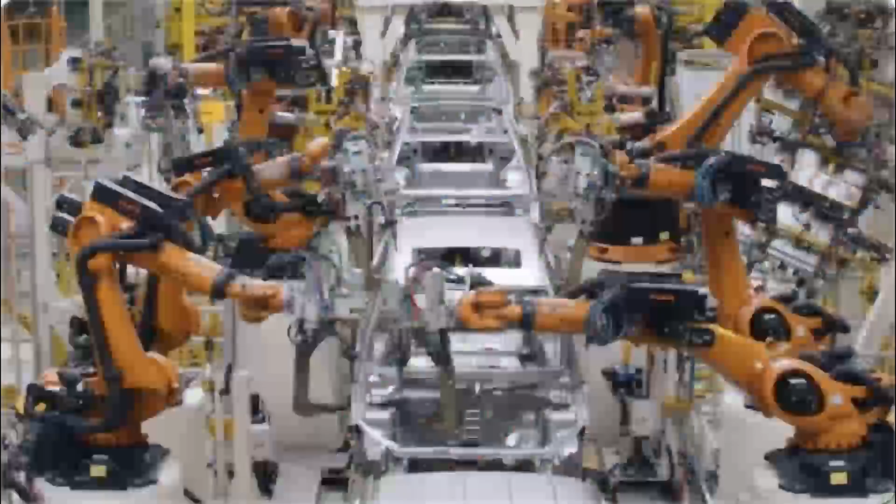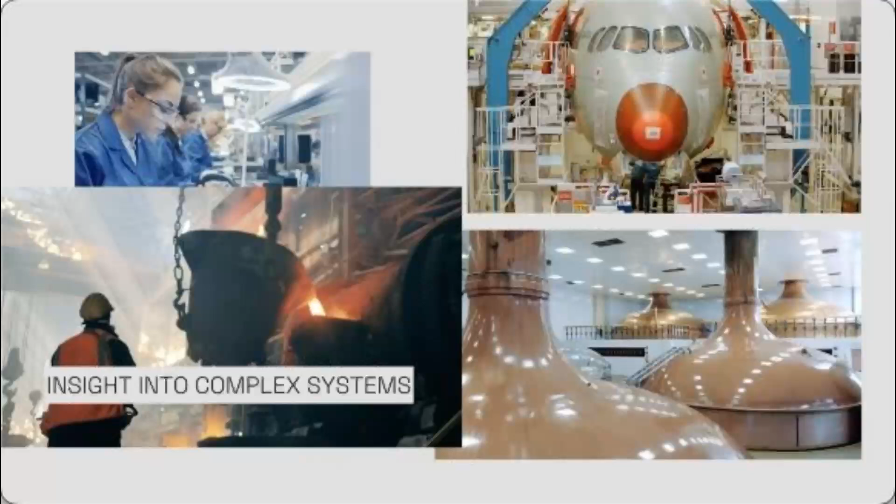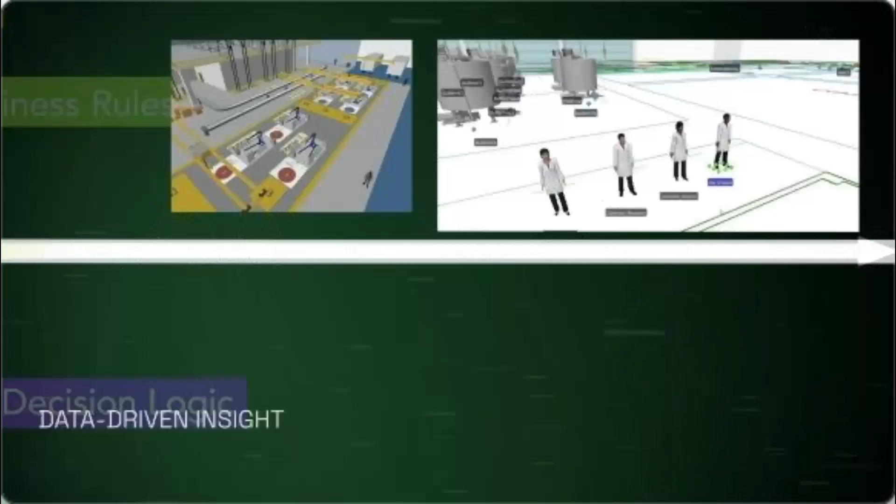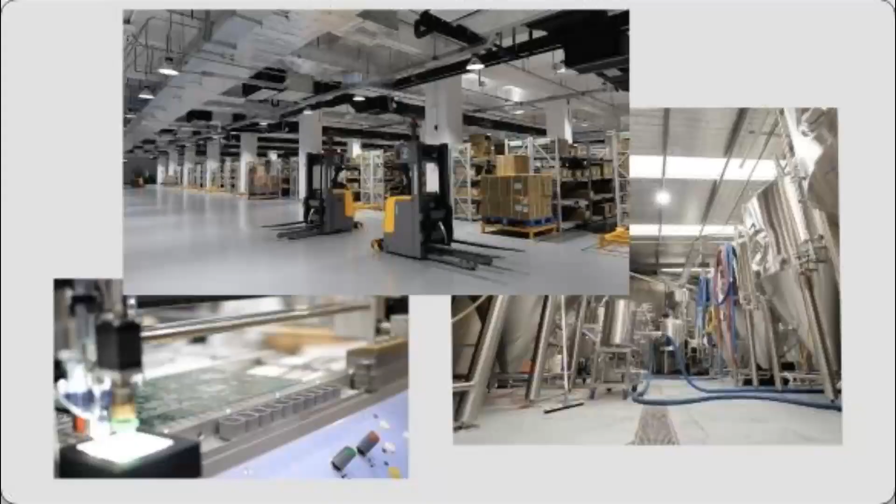At Simio, we're in the business of showing you the future. Our intelligent technology gives you unprecedented insight into complex systems to identify and solve today's inefficiencies and tomorrow's challenges. The Simio solution provides a low-risk opportunity to drive transformational change. Our true digital twin models capture all the constraints, business rules, and decision logic that define the operation of your system. When powered by your data, easily evaluate unlimited scenarios and deliver optimized solutions. No matter what industry you're in, eliminate your greatest operational process and scheduling challenges with a Simio digital twin. See your future success, Simio.

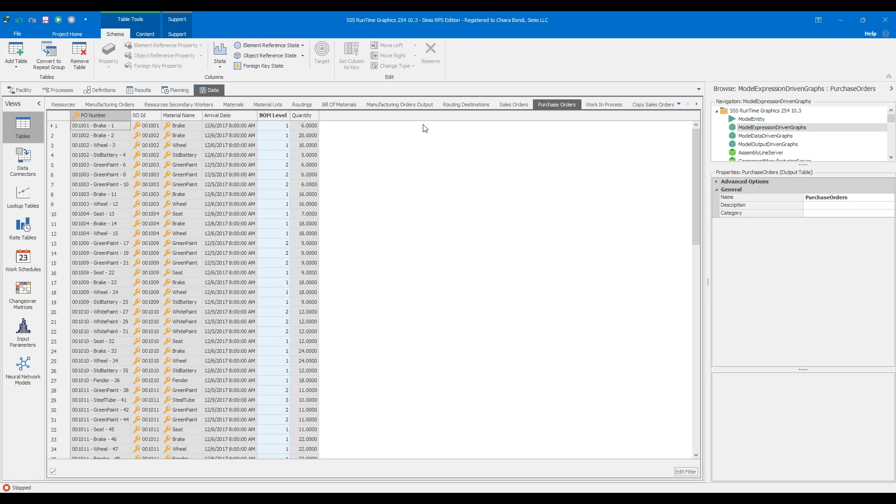So again, all of this is driven from data, which is stored right here in our data tab. All the different sales orders are stored here. And then depending on the materials required, we're actually producing different purchase orders for the raw material and then manufacturing orders for the different components that will be used in the actual sales orders.

Now, if we look back to the facility, we'll see a lot of visual components attached to it. Some of them have been explained in our previous Simio Sync Series by Adam on how to enhance the visual component of your models using different graphics and visuals. If you want to learn more about that, I highly suggest you go back and watch the recording of that session. I think that was very interesting.

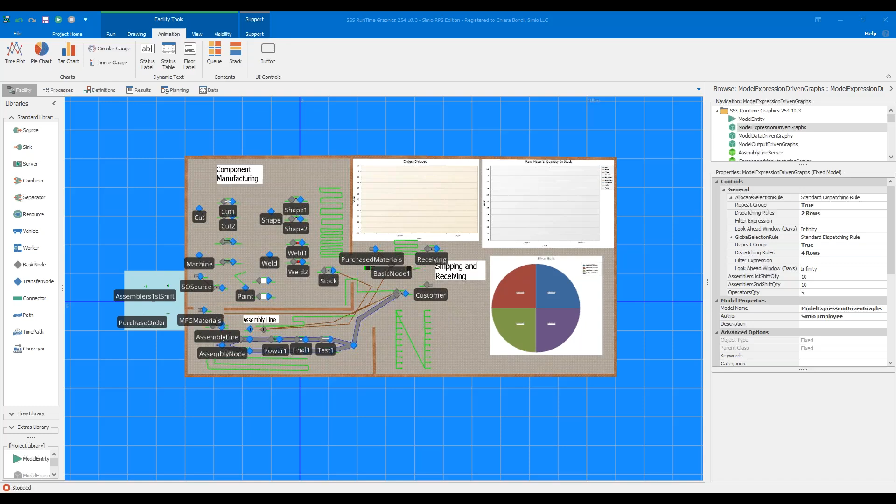But in this particular session, what we're focusing on is more on the right-hand side of the screen — specifically, the ability to add different charts to your model to visualize data in real time. Since the release of Simio 249, there have been a few updates on the different possibilities of what types of charts you can use. Right now I have, let me zoom in over here, 3 different charts, all sourcing data from specific expressions that I've inputted into the actual charts.

So here, for example, if I then expand onto here — confirming you can see my property editor? Yes, Chiara, all good. Okay, awesome, just making sure that we're sharing all the screens. So in these different charts, you can add or remove very specific expressions that you can type into, kind of like you would do any other expression or assignment in process logic.

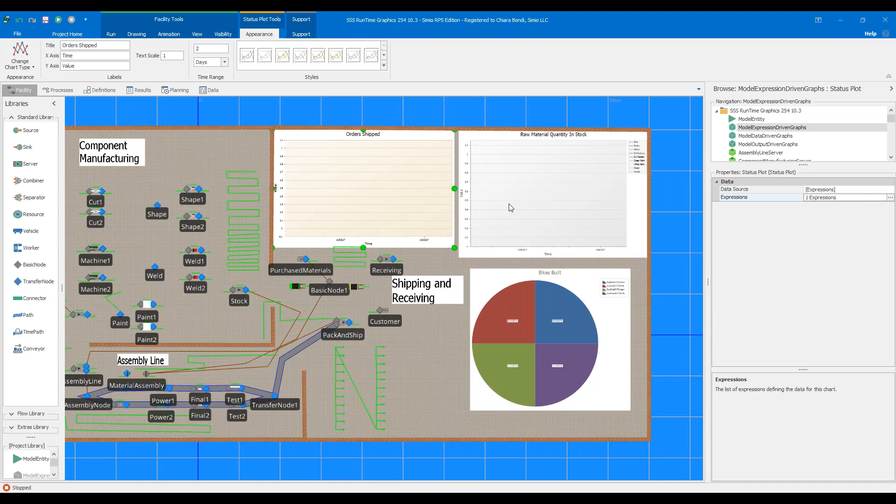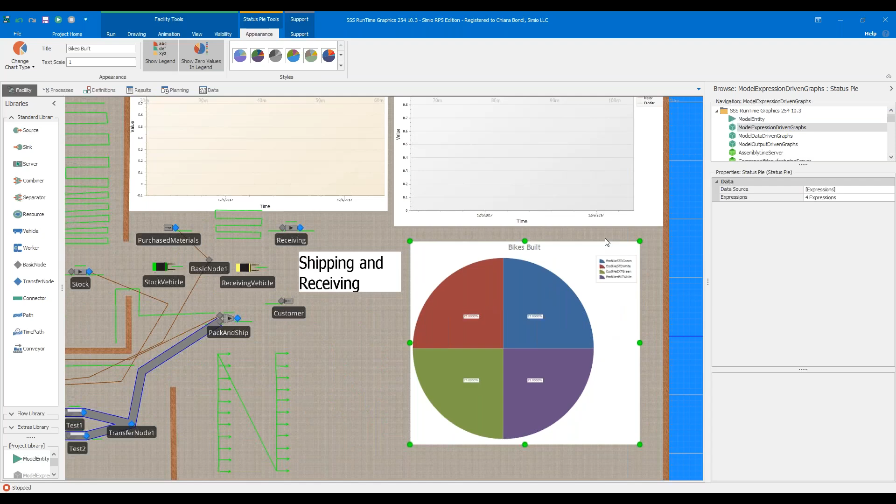So in this one, for example, we're looking at the number of sales orders that are shipped, or here, for example, we're interested in seeing the quantity of raw material that's available at any one time. And in this particular pie chart, we're looking at the proportion of different bikes that are being produced. Specifically, this model will produce 4 different bikes.

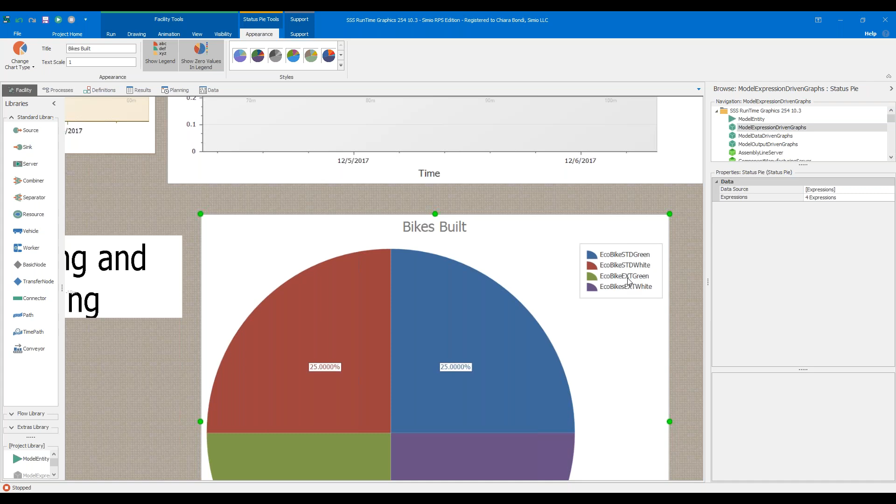Eco bikes in their standard format, green and white, and then in their extended format, so motorized, again in those 2 colors. And we're going to be seeing out of all of the sales orders what kind of ratio or how many are being ordered of each type.

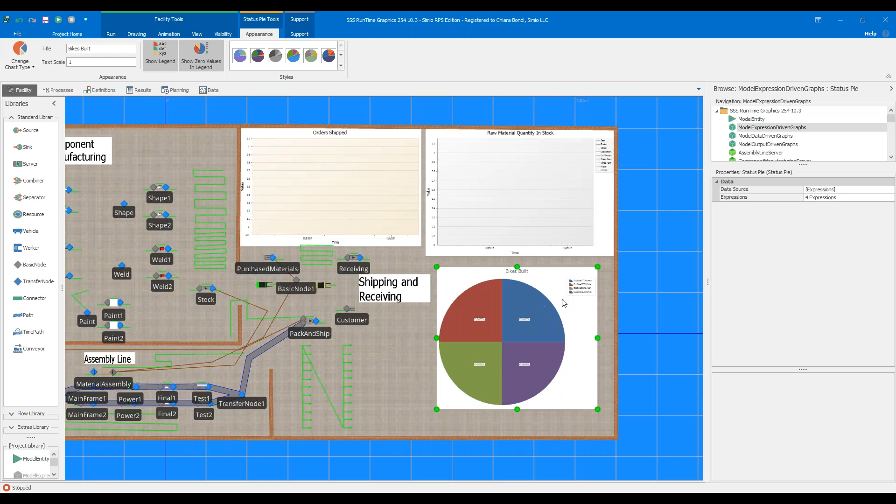And so as the model runs, we can see from these specific charts that we're getting all of the different data specified in the expressions updated in the plots in real time. So here, for example, we can see that one of our sales orders right now is just for a standard green eco bike. And in this other plot, we can track in real time how much raw material is available at any given moment.

One of the first updates I want to highlight from the Simio 254 version or edition is the addition of the ability to utilize bar charts, which I will showcase in some later versions of the same model.

But now during the model, not only can we see these time plots or pie charts, but we can also utilize bar charts to display data for different expressions, similarly to how all of these are being utilized. So we can see as the model runs, some quantity available has increased because we ran low on inventory, so we had to place new production orders for all the raw material that's available.

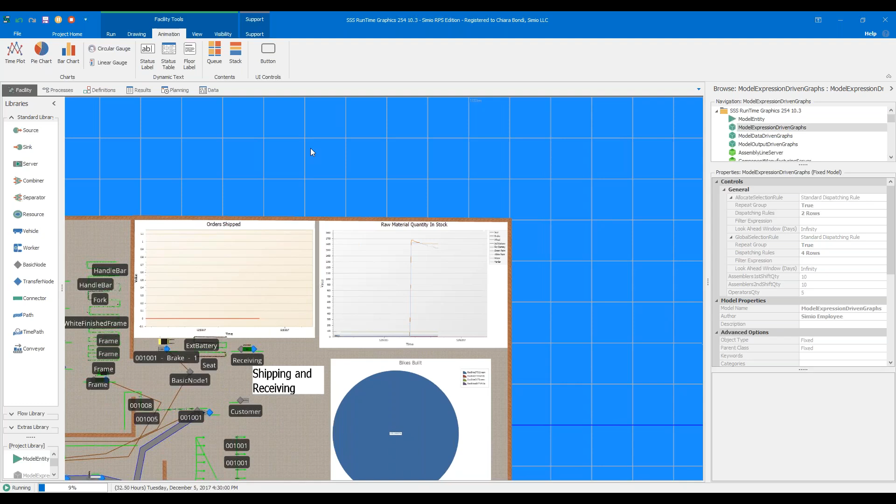And soon, starting about December 6th, we'll start seeing some orders being shipped and getting visuals of the ratios of what type of bikes we're producing.

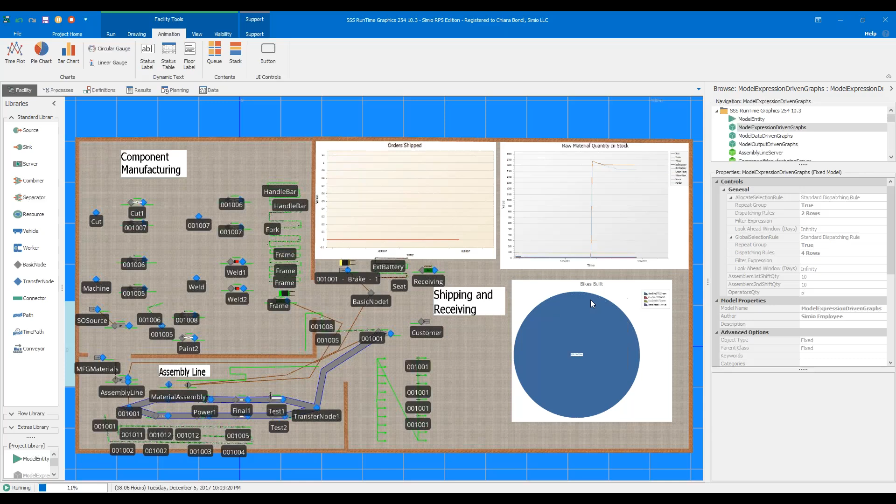Now, this is a great feature of the software, because similarly to the material in stock, and in a moment when all of these start populating when orders get shipped, we can track in real time during our model how all the different entities are flowing and other kinds of data we might be interested in keeping track of in real time.

So for example, when our material reaches its low point, how long it takes to get that inventory replenished, and to how much we're replenishing it to, or any other sort of ratio, such as the time it takes for machinery or orders to be fulfilled at a particular station, or any other kind of statistics or expressions that you would be interested in.

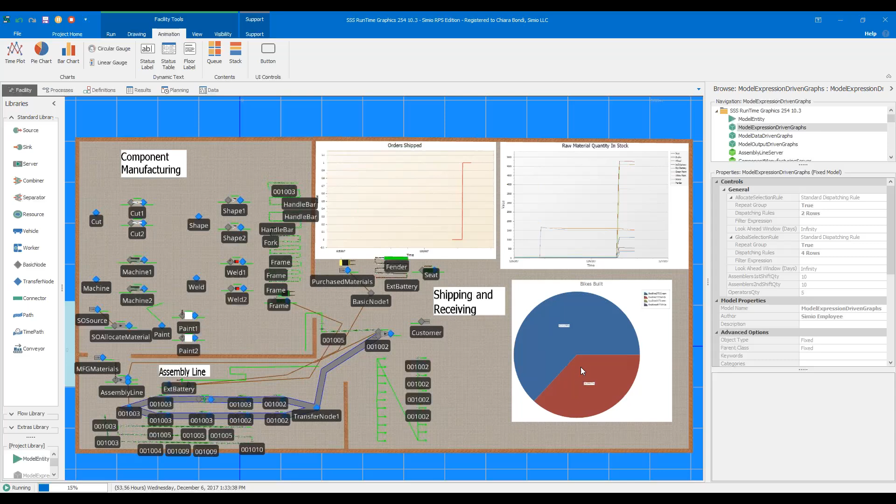So now we can see as orders are getting shipped and new bikes are being produced, we can start to see how these plots are getting populated. And now we can keep track of what the demand looks like, for example, for the different materials or the different bikes. Again, this is great for getting a sense in real time of what the demand looks like for the different bikes, so that later we can keep track of what kind of raw material is required for maybe the highly demanded products.

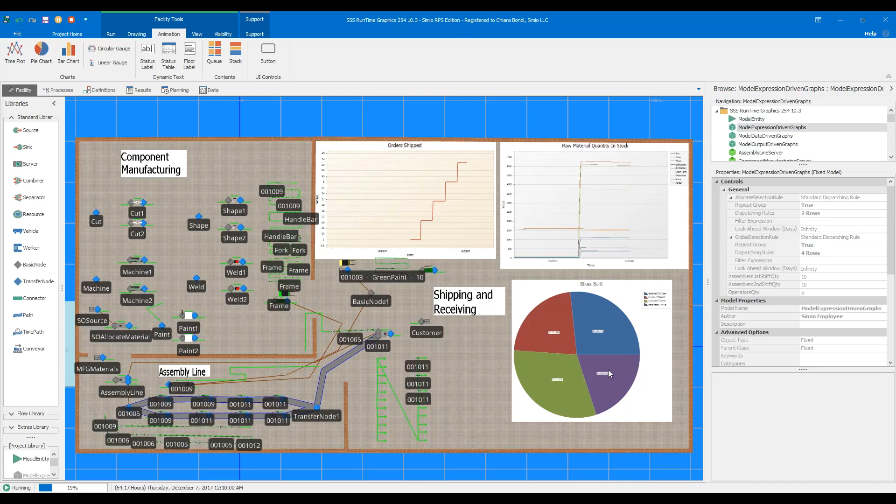So for example, in this case, it seems like the majority of the pie is consumed by the extended or expanded bikes. Now it's changing up and down. But it can help us get an understanding of maybe what raw material we need to have more available on deck based on demand.

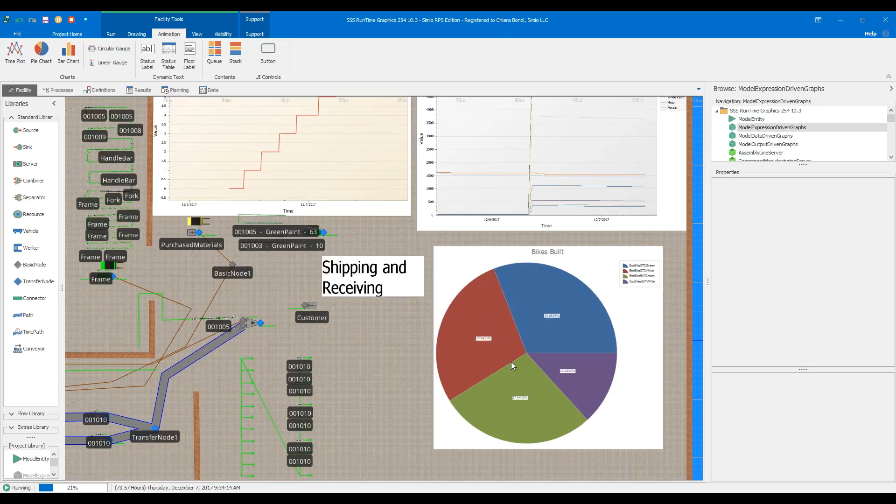Now, one thing to note, as you saw here, I'm going to stop the model just to showcase that one of the things you can see here, for example, is all of the different materials have been manually placed as different expressions, specifically 9 different expressions. And if you had more raw material, trying to get these plots to show the quantity in stock for all of them can get really tedious. So supposing you have 15, 20 more raw material available in your facility, trying to add expressions for all of these would be pretty tedious to do.

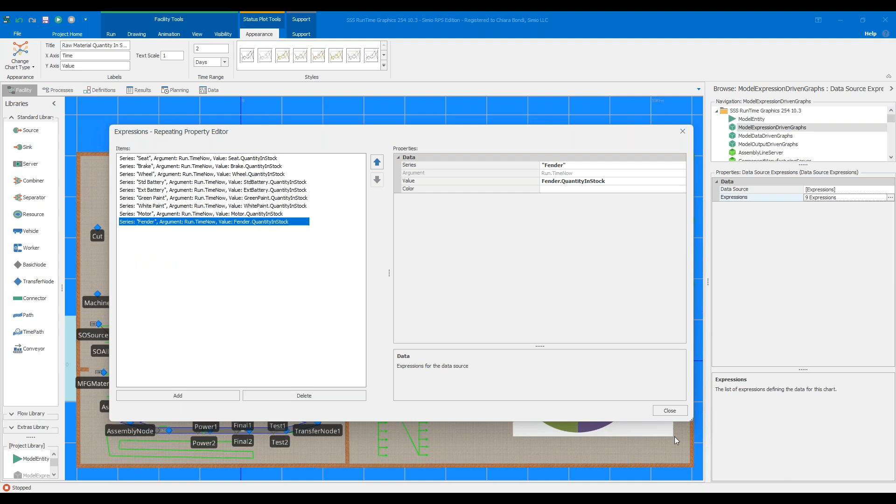Which is where one of our next enhancements comes into play, which is the ability to connect your visual dashboard animations here to data tables, both standard input tables with some state statistics as well as output tables. And that's going to be the next model or version of the model that I want to showcase.

And so what we can see here is what changes is the data source that's available per plot. So here, for example, I've placed it as expressions, where I go into our repeat group and add all the different expressions I would be interested in visualizing.

However, if I expand on this, we can see there are some already embedded data sources, specifically those related to resource states of a particular specific resource. So trying to see what percentage of the time, say, an operator is idle, on shift, off shift, busy, etc.

But then as I keep scrolling down, we start to actually see our data tables. So now we can connect output tables and input tables with state statistics, for example, connected to our plots. And I'm going to show that now in the next model.

But before I do, I want to stop and see if there's any questions on the plots I've shown thus far and the expression editor for these plots. No questions yet, Chiara. A generic question that I'll probably wait to hold until the end. Okay, perfect.

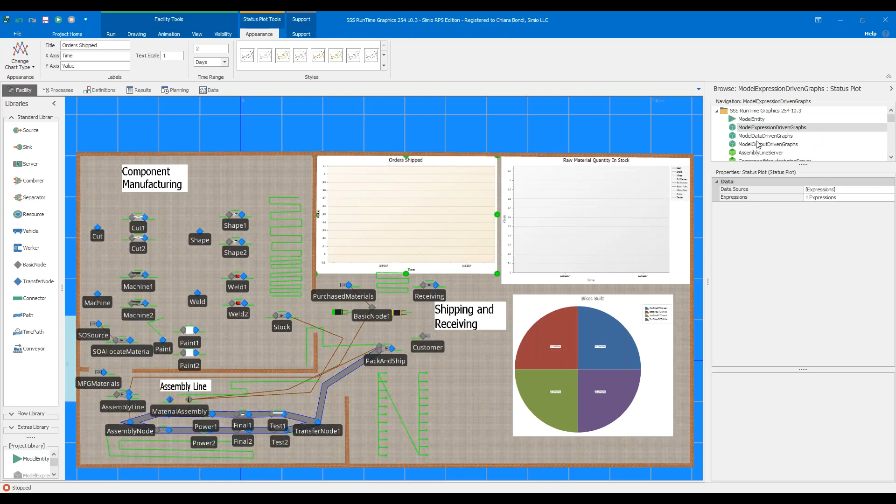So I will now dive into the next model, and these are all the same exact model. Again, it's the same sales orders coming in, and depending on material availability, we're going to produce however much we can before placing production and manufacturing orders to get the material that we need to fulfill said orders.

However, here, what's different in this model versus the other model is the data that I'm displaying. Specifically, in this particular plot, I have added from our animation side a status table.

Previously, to showcase a lot of different state statistics and state values, we would need to add status labels individually, one by one, and specify what expression we wanted to showcase. So if we wanted to show a tabular format, similar to how data tables store state statistics, to showcase that during the run, it would be quite challenging, as we would have to manually create all the different status labels for the different entries.

Whereas now, with these new enhancements and the ability to connect data tables to our different animation tools, we're able to implement that same visual component, but in a much more efficient manner.

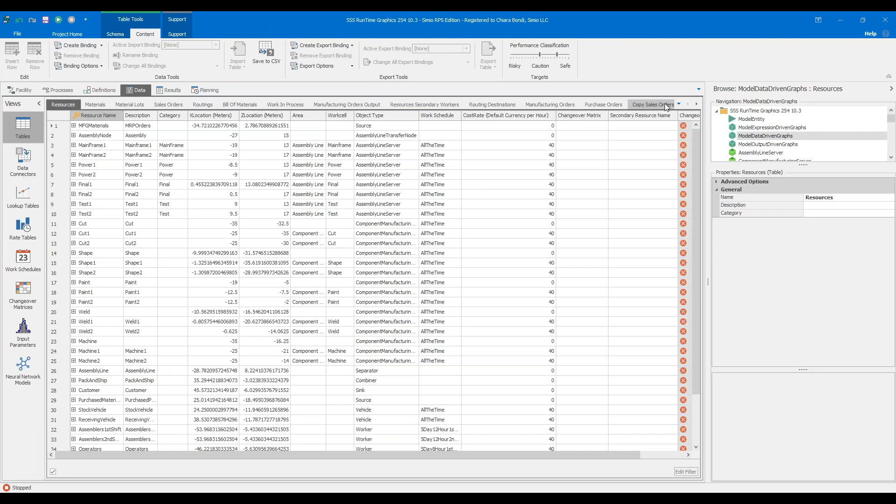So now if I run the model, and before I do, let me showcase the data table that this is referencing. If I go into data, this is referencing this particular table that I have created. It's a copy of our sales order table with just specific columns that I want to showcase.

We can see that there's going to be information both static as inputs and then dynamic, so our different state columns that are going to be updated as the model runs. So we're able to see dynamically how this table gets populated.

Previously, if we wanted to see how this table gets populated, we would need to run the model and then pause it and go see what those values are, and then run the model and pause it again to go back and see what the values were. We weren't able to see during the run how these were updating.

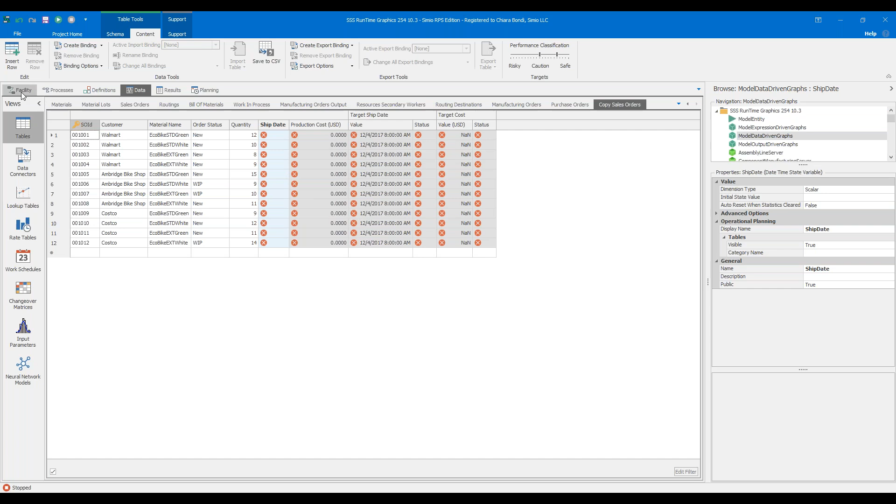Whereas now, thanks to the enhancement of our status table, if I run the model, I'm actually going to place a breakpoint right there, just to fast forward to showcase that aspect, because it's about here when our first order gets shipped.

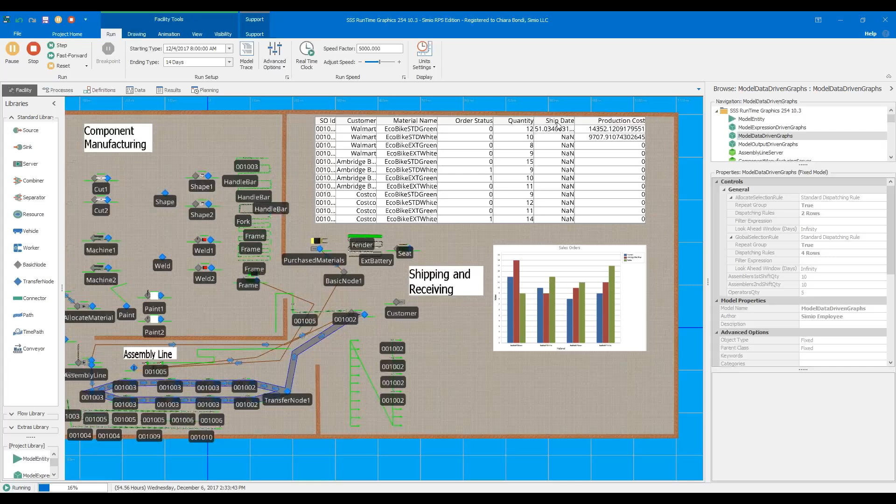And if we wanted to get more exact on the actual date time, we'd be able to go here and see this displayed. But here in this table, it's displaying the ship date as hours.

We can see here not only the production costs associated with each order, but we can also keep track of what order is starting to be produced first. So we can see that all of these haven't started yet for the middle ones, the eco bikes. However, all the orders set for Costco have started production, and we can see how their costs are starting to add up across the different products.

However, one thing I want to note is right here, I have a bar chart, which again was one of the additions in Simio in the 249 version of Simio. But you'll see that it's static.

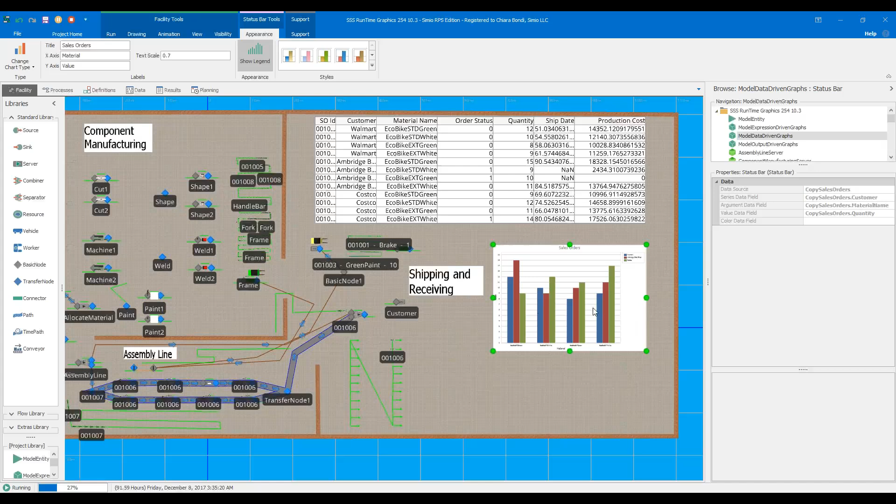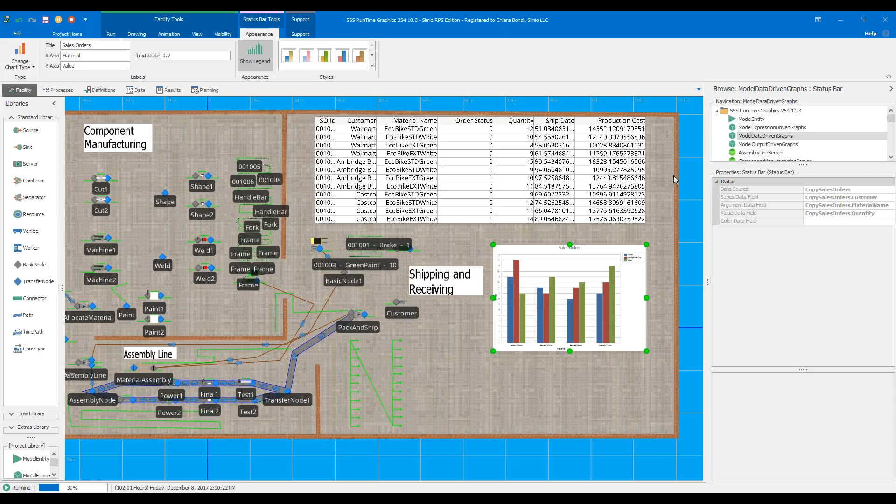Notice how the data source is actually the same data table as our sales orders right here, so it's the same data table connection. However, this table is not being dynamically updated, and that is because that particular table is not an output table. It is a data table with some state statistics.

So if we wanted to display some output data stored in data tables in a more dynamic manner, we would connect these instead to output tables rather than data tables with state statistics. That's going to be the next model that I showcase.

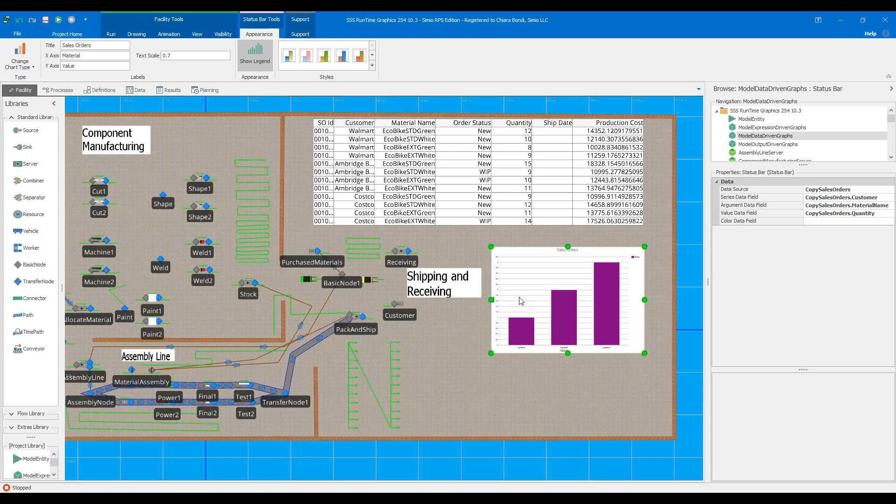And so here now we can see that, for example, we can connect these status tables to tables where we're showcasing order ID and other static information as well as dynamic information being updated. And if we wanted to connect pie charts, table plots, or time plots, we'd be able to connect those to output tables to showcase some real-time visuals.

So if there's no questions related to any of these aspects that I've showcased here, I can dive into the next model. There actually are a bunch of questions rolling in, Chiara. Okay, let's go into these questions.

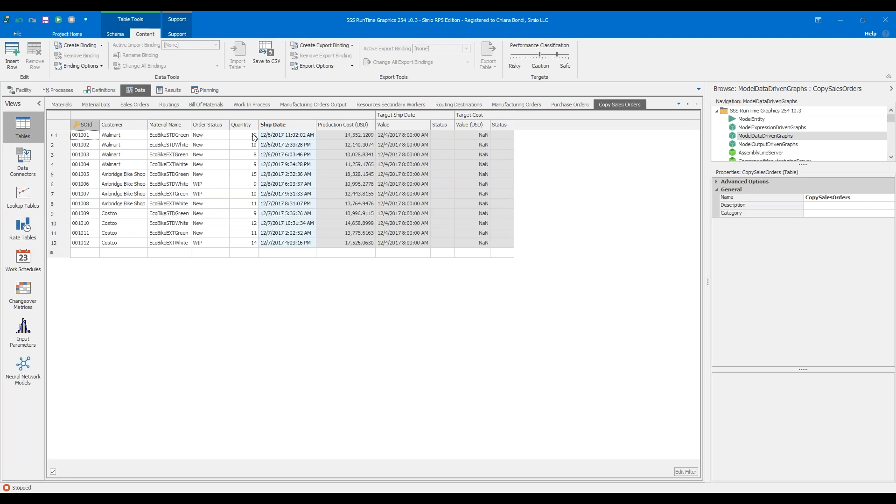Are you able to filter the rows or columns shown in the status table? Unfortunately, no. Right now, with how the table is set up, you are not able to filter particular rows or columns. The way I personally did this table was I took the sales order table, where all these values are also being stored, but removed the columns I wasn't interested in, since I'm using the sales orders table to create all the different orders and run them through the model, whereas this one is for visual purposes. So that's how you can choose what columns are shown. You can't filter by row here — you'd have to remove the rows from the original table.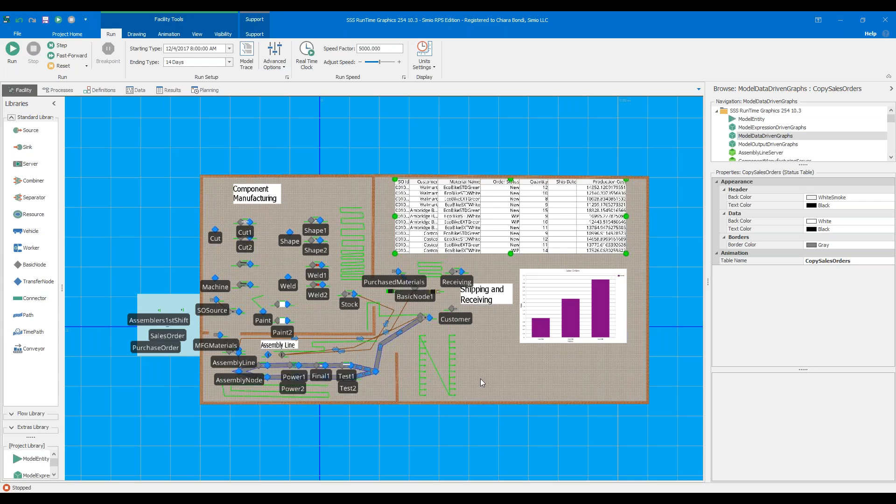Next one: how do you truncate the number of significant figures in the status table? To truncate the number, it's the exact same value that is being stored in the state table. So the way to make it smaller would be in how you're originally storing it in your data table — adding a round to however many significant figures you'd like, or using the math.floor or math.ceiling expressions. So if you didn't want to utilize all of it when storing our time or our production costs... it's right here, in this output node.

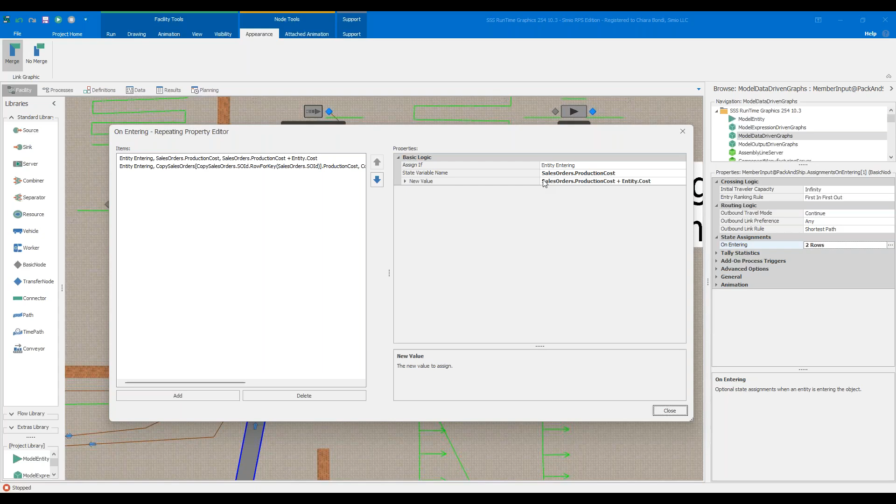So this value, for example, instead of just being the total cost, we could wrap it around a math.round. Just very quickly to show that — math.round is our function to round to the nearest integer, or if we're specifying how many significant figures we want, we can do that as well. All right, perfect, that's the questions for right now.

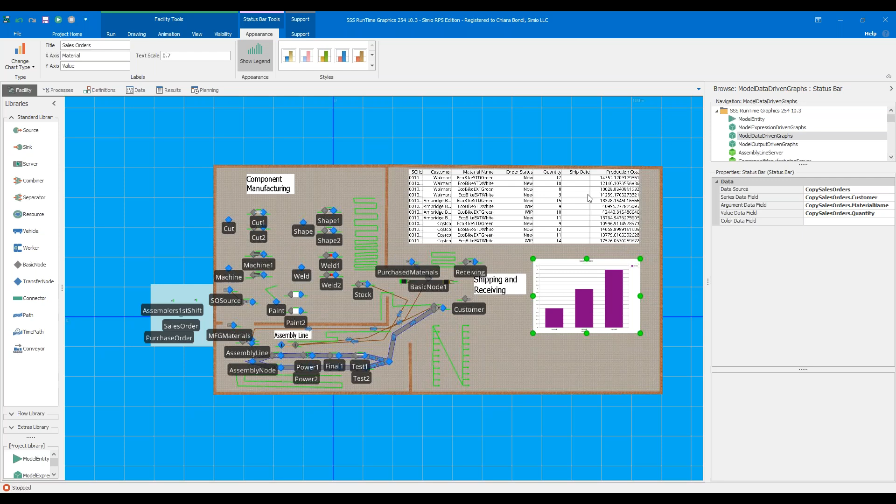So now we've seen how we can visualize these tables with state values being stored during the run, but maybe we want to now implement some dynamic plots showcasing data of interest. As I've mentioned, when we attach a data table such as the sales orders, even though it contains some dynamic columns, those won't display here. So the way to do that would be utilizing output tables.

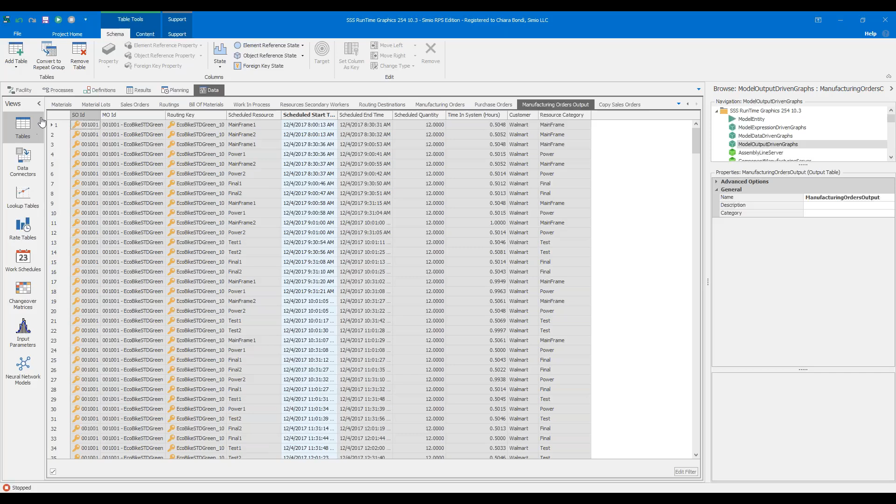That is this final model where we have three different tables, all tied to output tables. Specifically, we're utilizing the manufacturing orders output table, which if I go into the data tab, we can see that as our sales orders come in, and we need to place manufacturing orders for all the components, depending on what kind of bike we're producing, we're storing information on the resource we're utilizing, how long it's being seized for the particular task, the quantity we're producing, as well as what customer that particular order is associated to.

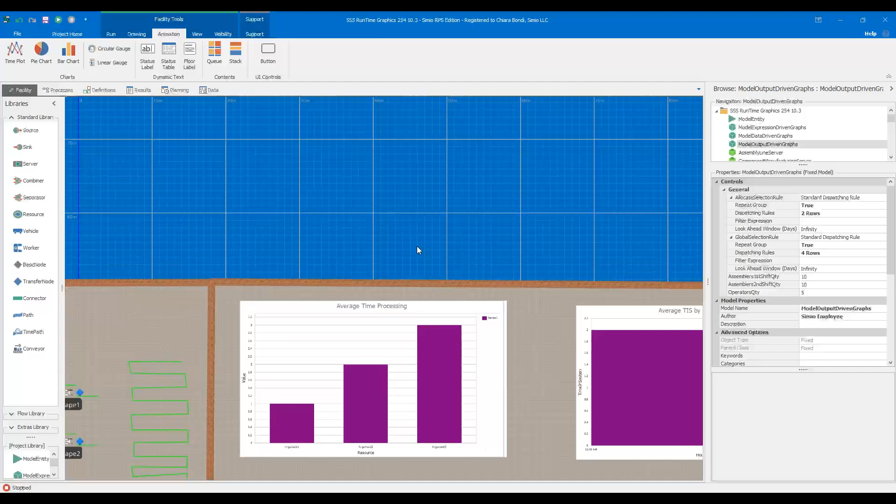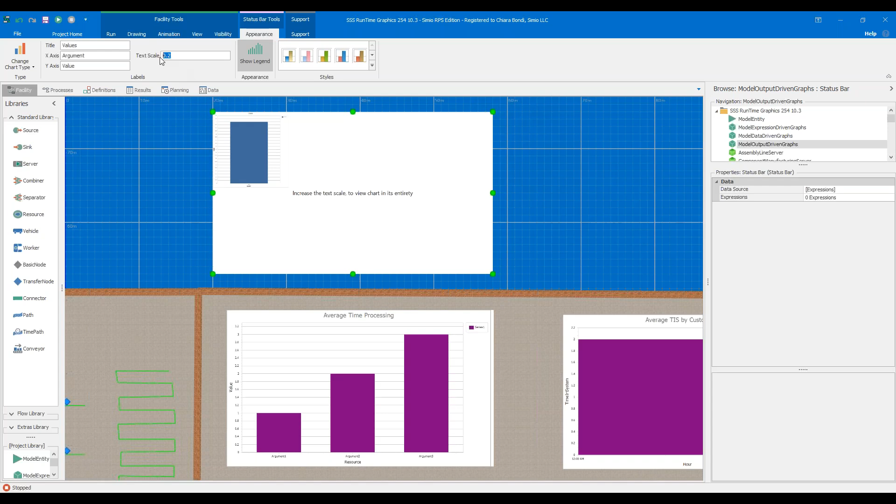And here in our facility, when we attach that table, let me showcase how this can be done — I'm going to recreate how this exact table is built. The way in which this table connects to an output table as a data source is by going to our animation and selecting the plot you're interested in. In our case, this is a bar chart, so you'd be creating it. I like to change the text scale to 0.7 in the appearance properties, just to make it more easily visible.

If I select the plot, you can see the data source — the default is expressions. However, as I've shown before, if we scroll all the way down, we start to see all of our tables, and as I keep going, I can start seeing all of my output tables. In our case, one of the output tables we're interested in is the manufacturing orders output.

And as soon as I do that and select an output table, we see that the properties here are changed. So now we can specify, based on the table that we're mapping this plot to, what our series data field would be. So kind of what each point is related to, the argument, the value that we want to represent. Are we trying to look at time in system, quantities, costs, etc., and if that's being stored.

So here, for example, we can see on this particular table that I am curious to see, from a customer standpoint, for every single resource that they are seizing to produce a particular product, on average, the time in system using that particular resource.

And these two functions right here, specifically the summary function as well as the aggregation interval function, are two new updates from the Simio 250 release.

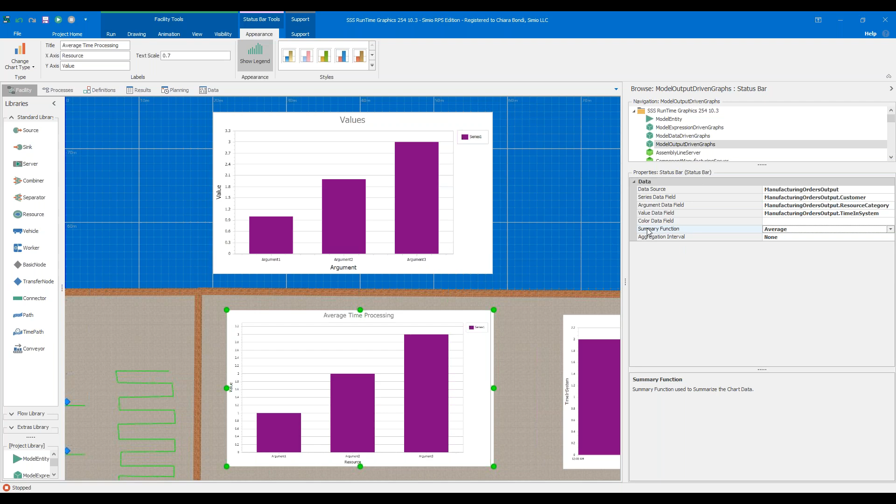And then the aggregation interval, again an update performed in the 250 sprint, allows us to aggregate the data over a specific time frame, so whether that be hour, day, month, quarter, etc.

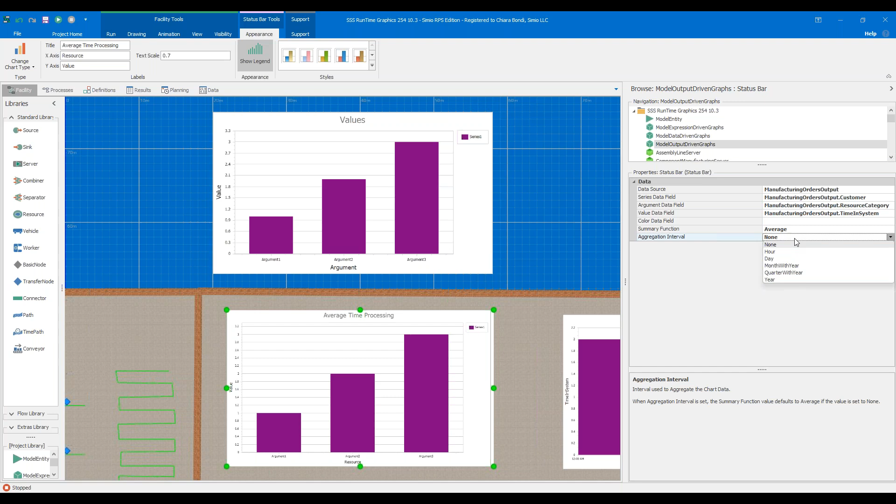So now if I run the model, it'll take a second for the data here to actually populate, just because it takes a bit for all the different orders to show up.

But we can already start to see for all of our different manufacturing orders that are coming in, as that data gets stored in our output table, we are now visualizing these plots getting updated in real time.

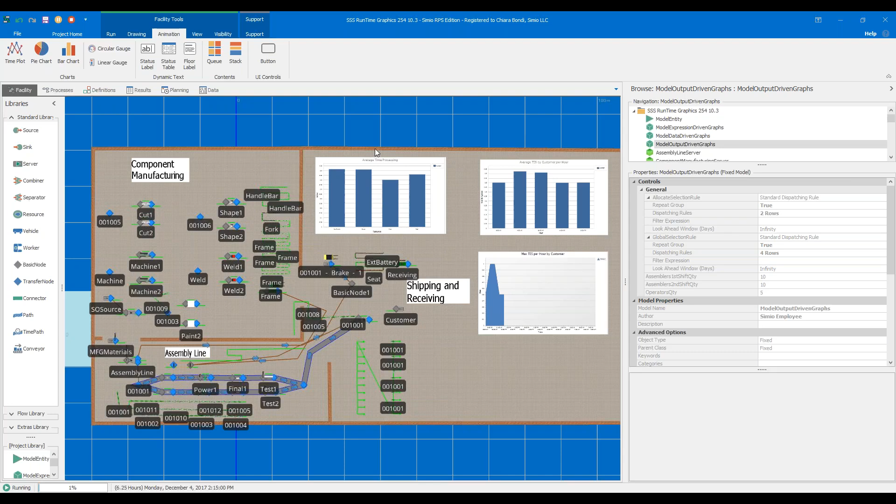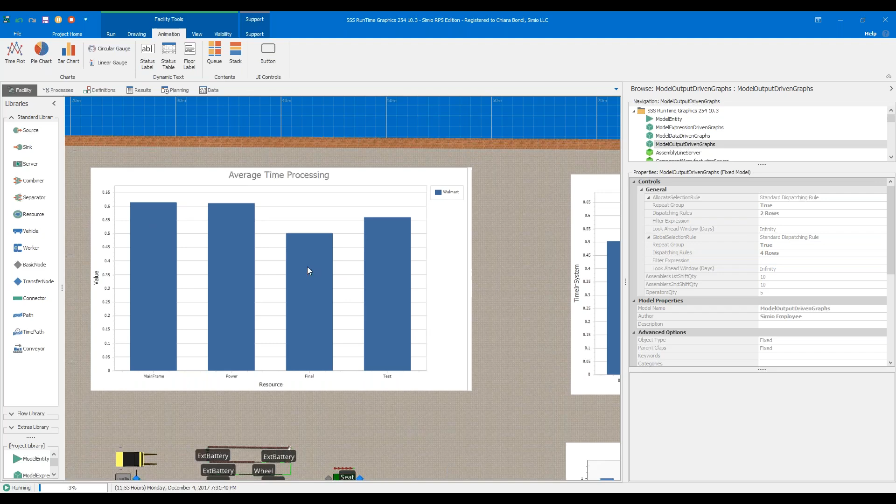So for example, right now we're only producing bikes for Walmart. We can see on average all the different components spend in the main frame just over 0.6 of an hour, about half an hour at the final. Maybe they test between half an hour and 45 minutes, etc.

Oops, I've expanded way too much.

And again, as more sales orders come in for different customers, we're going to be able to see how those differ per station. So maybe we can see that by a customer base, or maybe a product type base, etc., they might be spending more or less time at a particular station or at a particular location.

So this is great for, say, trying to understand where potential bottlenecks might be, right? Because you're able to then see in real time, as that data gets stored, the time in system or the time idle for particular locations based on specific properties of your entities.

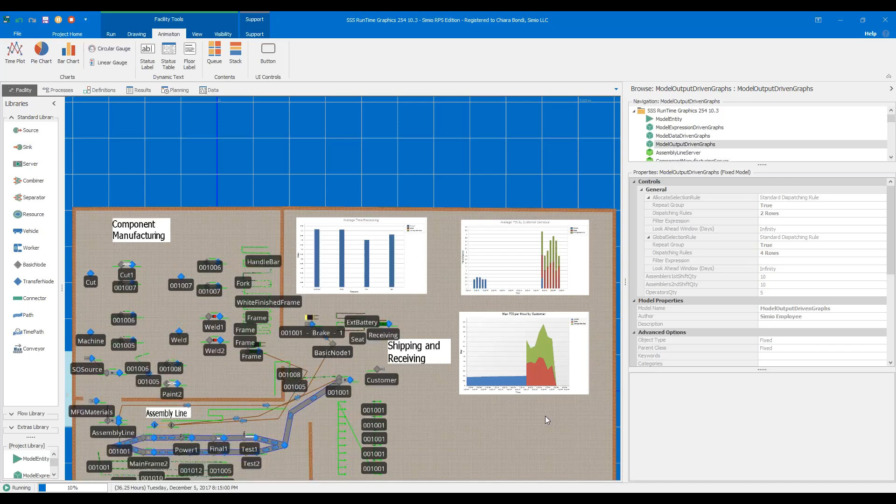And so you can then see, I can now visualize in real time where everything's getting paused and how long they're spending at particular stations.

So if I zoom in all the other plots, for example here, we can start to see as more orders are coming in, their average time in system by hour out of a particular product. We can see that, or the maximum time in system of all the different orders per customer.

We can see that, for example, the Ambridge bike shop, or all the orders that are specific to the Ambridge bike shop, are spending a significant amount of time longer in our system.

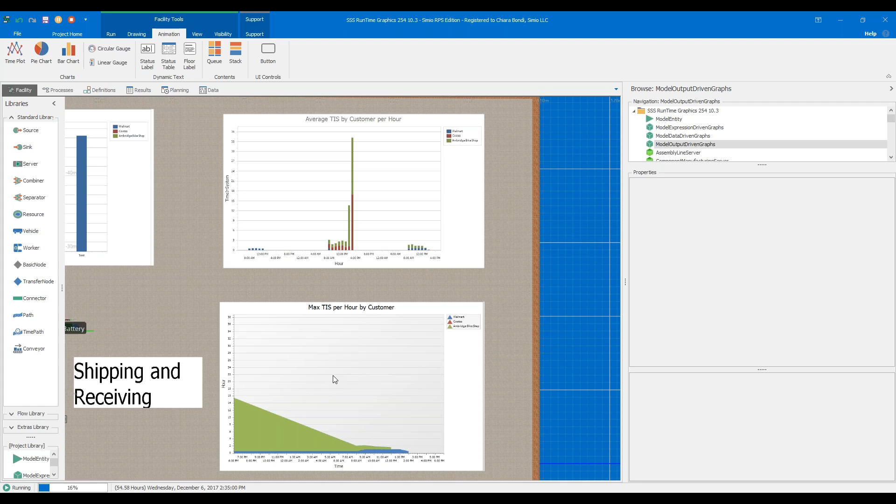So now we can go back and analyze, well, what is happening? Do we need to prioritize those orders, maybe based on changeover matrices or required material, before prioritizing other orders, etc.

And so again, this is great because previously, in order to see the data being stored in the output tables, we would need to pause, go into the data, then see all the different information, which, as you can see, can be very extensive depending on how much you're storing.

And then if we wanted to keep populating, go back, keep running, but we wouldn't be able to see, as these are getting updated, we wouldn't see those updates as the model runs on the table. We would need to, again, stop or pause.

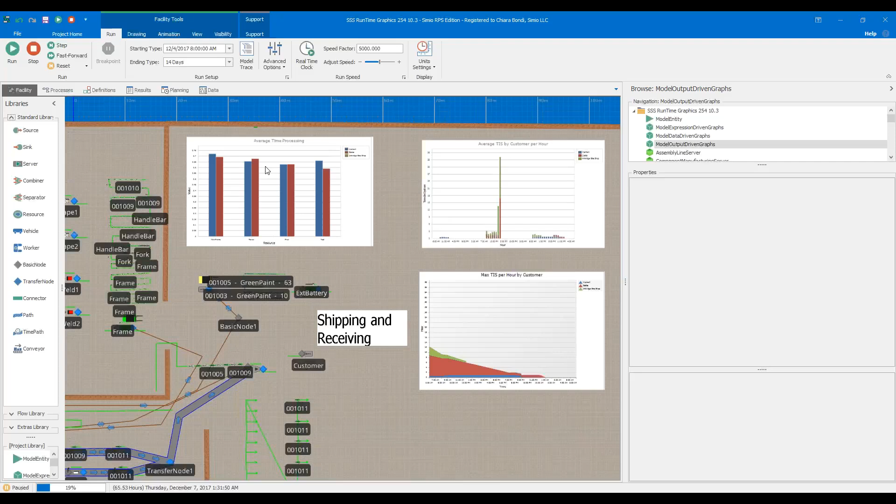And now we can see that if I keep scrolling, new entries have been added. But I wasn't able to see those. I wouldn't be able to see these entries in the data table. But now, thanks to these data table enhancements, we're able to see those updates and changes in real time.

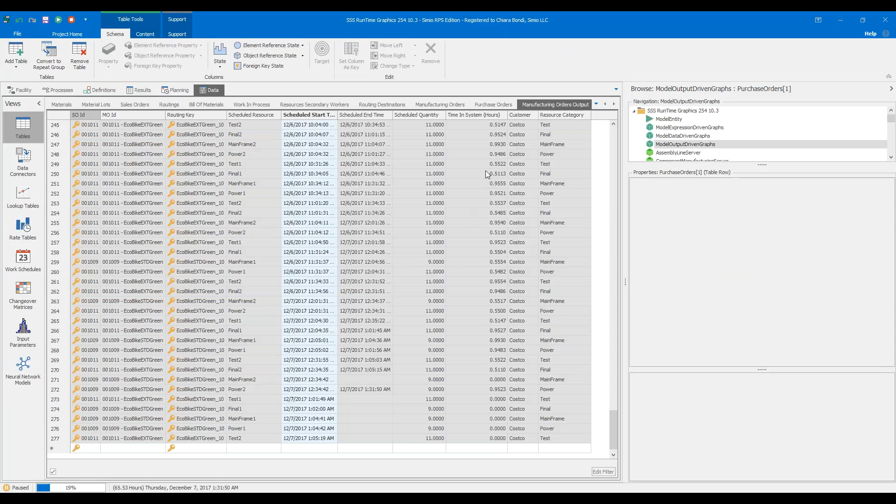One final thing I want to highlight, as well as an update in Simio, is the use of dashboards. Although we can't see the dashboards in our results section being updated in real time, similarly to how these tables are getting updated, we can now pause the model and see how our dashboards get populated. We no longer need to fully stop the model to see what information is being stored in the different dashboards we've created. We can see these changes occur in real time, similarly to how we can do that with the plots on our facility, but we no longer need to fully stop the model to see any update being done in our dashboards.

That's great because it's a great time saver. If we had to constantly stop and rerun the model, obviously in Simio we're able to run models fairly quickly, but having to do that over and over—stopping, restarting, etc.—can still be tedious. Instead, having the ability to pause the model, see the dashboards, see the tables, and then as the model runs, see that information get updated in real time, is a great tool for real-time analysis and also just a more efficient understanding of how everything runs.

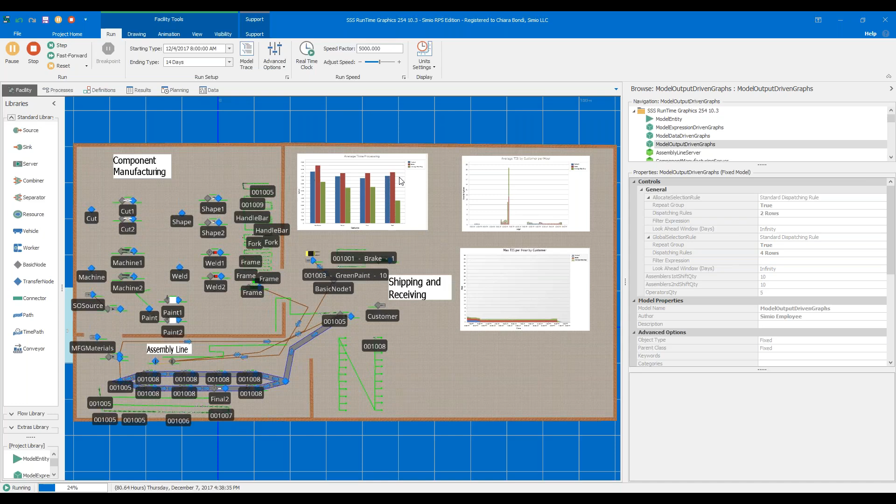So these are some of our chart enhancements that have been done over the last few sprints. I think that these, combined with the output tables and dashboards, allow the user to get a really detailed understanding of their facility, and depending on the type of data they're displaying, get real-time understanding or knowledge of where potential areas of improvement are, or potential bottlenecks, areas of concern, resource changes needed, etc. With that said, thank you so much for listening, and I'm happy to answer any and all questions that have come in.

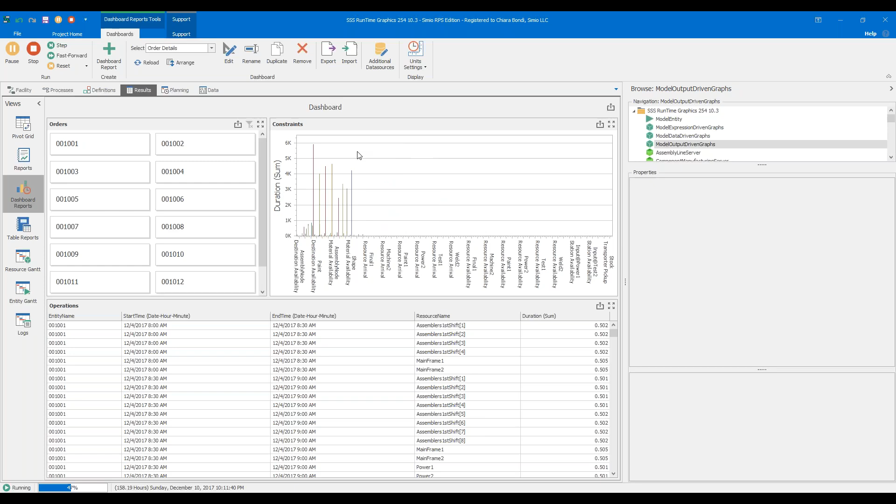One of the benefits is not needing to wait for the model to run or reach a certain point to see how all the entities are flowing. Having the dashboards is great for being able to showcase really extensive data at the end of the run in nice visuals to display results, display findings, output tables, etc. But I think it can be really challenging to utilize these to get an understanding in real time of what's happening in your model. Whereas with these real-time plots, because we're able to actually see how the data gets updated, we no longer have to wait until the end to go find maybe a data point of concern, an area that we might need to investigate a little bit deeper. We can see that in real time, how that's getting updated and what is happening in the system.

So I find that the dashboards are great for displaying ending results, key indicators, etc., and utilizing these animation charts to get a deeper, real-time understanding of that data that you're then using to display those KPIs. Because you might display at the end an indicator that seems a little bit off but don't really know what happened to it. Using these, you can figure out pretty well what happened.

Got it. So in essence, what you're saying is there's a place for both of them. It's not like one's going to overtake the other. You really find, from an opinion standpoint, there's a place for both of them.

Oh, absolutely, absolutely. I think the best way would be utilizing both of them: the real-time tables to ensure that the model is running efficiently and there are no areas of concern, bottlenecks, etc., and then the output dashboards to ultimately see how your well-run model concluded and all the final results for analyzing the overall functioning.

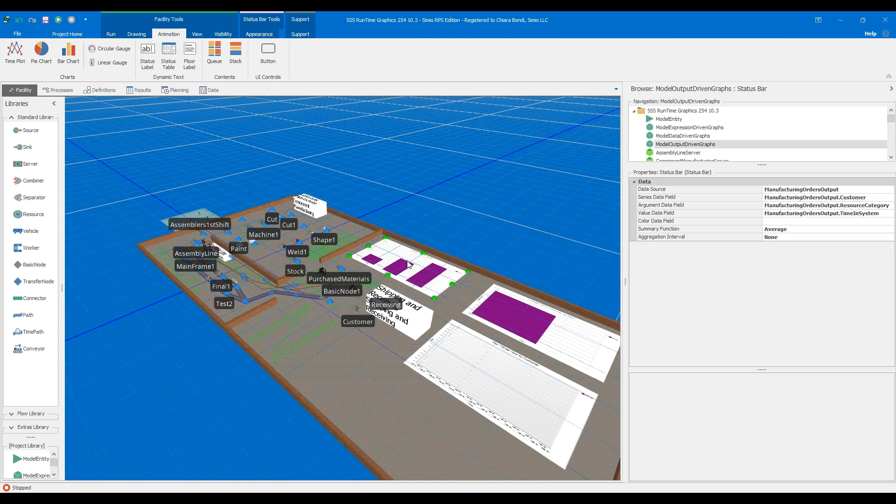I am actually not sure. I don't think so, but that is definitely a question we can get back to when I reach out to support. But from my understanding of these charts, there's no way to add a 3D component to it. Got it, that's what I thought, but I wanted to ask since it was out there. Whoever asked, as I will post at the end here, both Chiara and my email again, you can always reach back out to us as Chiara digs into this.

All right, next question. Do you find that certain industries prefer specific charts? I'd imagine systems dealing with customer traffic could find a lot of value from stacked bar charts showing trends over time, etc. Yeah, so I have not found specific associations between industries and charts.

But I do find that most people, the charts that they utilize a lot are time plots. For example, with manufacturing or production industries, utilizing time plots to see over a period of time the different quantities of material coming in or being utilized, or from a customer standpoint, the flow of customers coming in and out, utilizing bar charts as well. But predominantly, a lot of times what I've seen most users be interested in is seeing over a time period particular states or indicators, either through time plots or, depending on how you've set it up, stacked bar charts.

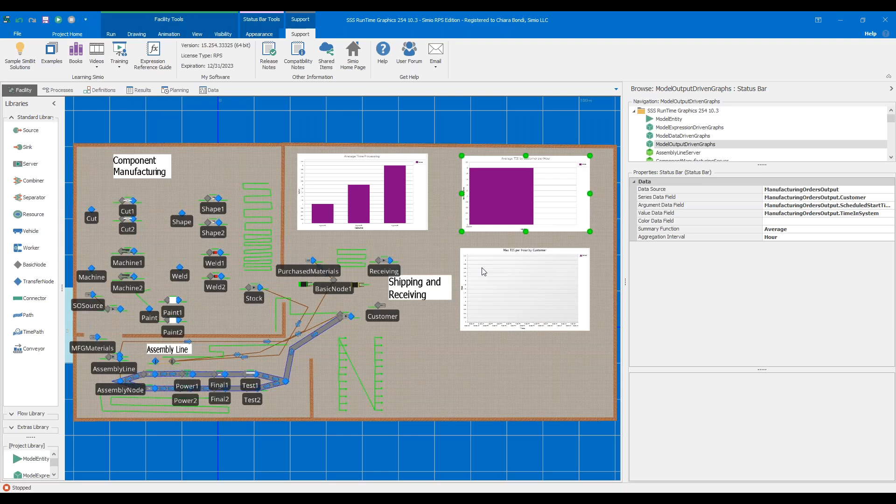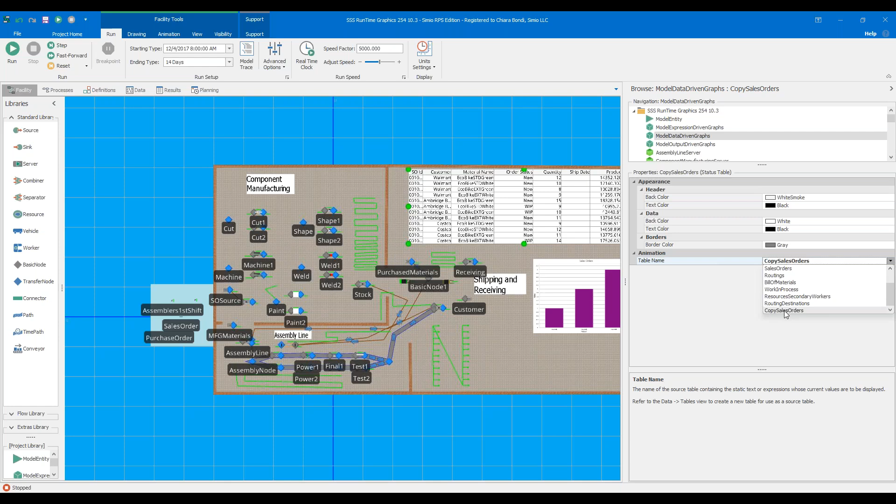So if this is specifically in an output table, yes, you would only want to write out the tables or rows that you'd be interested in seeing, as there's no possibility here to filter. If we're looking at these particular tables right here, which you can see when we have our status table, we don't actually have the opportunity with this table right now to map it to output tables. So if we wanted to utilize a table where we're storing information but only see specific rows, you could apply a similar technique to what I did, which was copy the exact table over to another table, but then only have the rows or columns that you're interested in.

Perfect, all right, give it one last look here for questions. Don't see any others coming in. Let me very quickly grab control of the screen back.